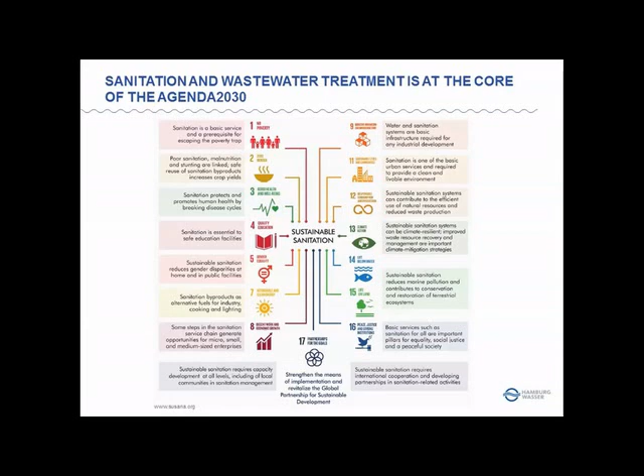If we look at the next slide, at SDG 6 specifically, it's not only one target - it covers 6 targets. Interestingly, sanitation and wastewater treatment has 2 targets, 6.2 and 6.3. Target 6.3 explicitly mentions water quality and wastewater treatment - by 2030, to improve water quality by reducing pollution and halving the proportion of untreated wastewater, and substantially increasing recycling and safe reuse. Safe reuse is explicitly mentioned, and as for untreated wastewater, you probably know the figure that more than 80% worldwide of wastewater is not treated so far. So that is a clear target to deal with.

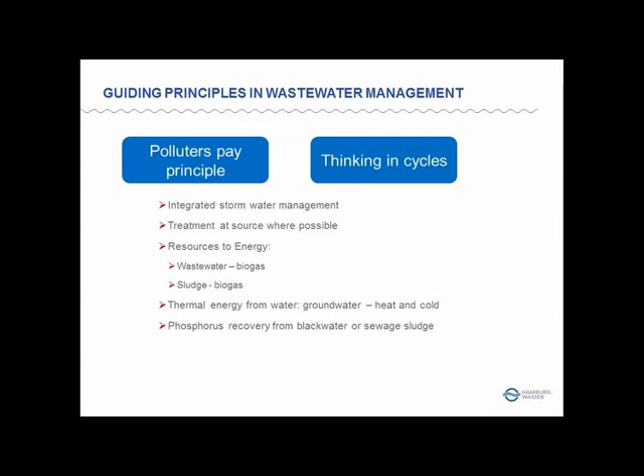Can you see it? I have to go to the next slide. Sorry, now here you can see it. The rainwater is collected in the pond and evaporated locally. As you can see, the grey water is the water coming from the household — from the washing machine, dishwashing, hand washing, and so on, but not the toilet.

That's the black water, and the grey water is separately collected and treated locally in this small residential area. The black water, from the toilet, is collected in vacuum toilets — all households have installed vacuum toilets so the black water is a little thicker, so to say, with a higher COD content, making it better and easier for digestion. So it's co-digested with organic waste in the digester locally, and heat and power are generated locally in a combined unit.

So that's now being realized. The digester has started to work, and we're very happy that it works now. We had a lot of public engagement, so the population is very positive about the project, which is important to have the customers on board, supporting, liking, and accepting it.

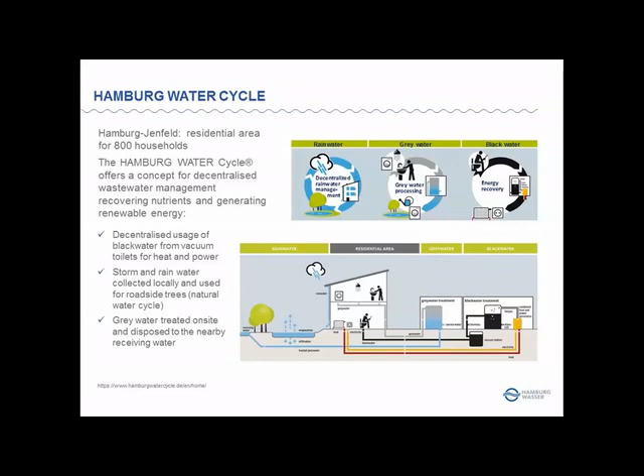Claudia, this has been very interesting and gives us the broader picture of where wastewater management fits in. I've also already learned something new, because I wasn't aware at all that artificial sweeteners would also be a problem in the wastewater system. Interesting.

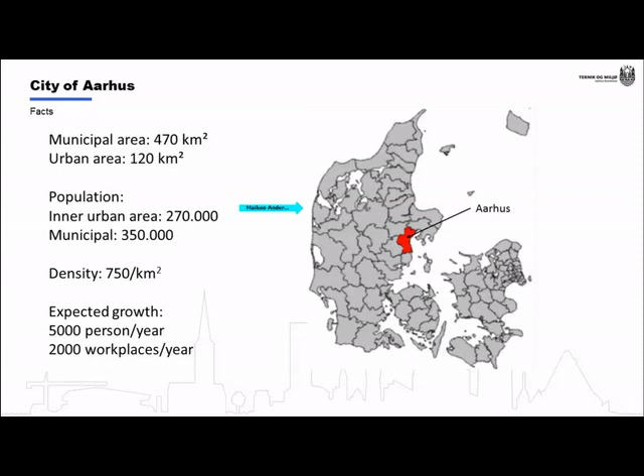We are growing very fast in a Danish context, and we have an expected growth, which we have actually also seen over the last year, of 5,000 new persons who move to the city each year, and we are developing 2,000 new workplaces each year.

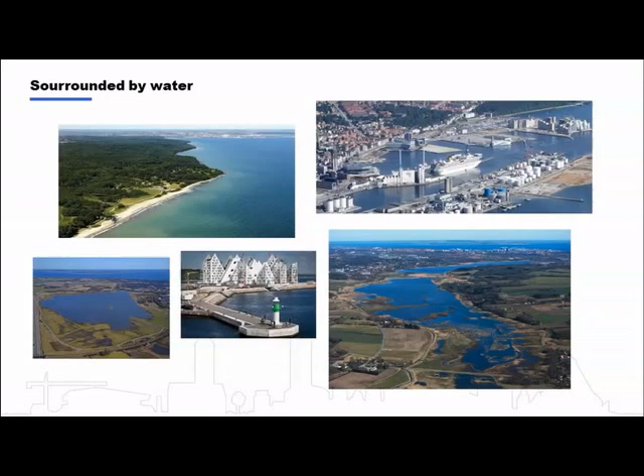We are surrounded by water, and the water has always been an essential part of our life, whether it comes to our coastlines, our lakes and nature, our ground and drinking water, or our harbor, which is the largest container port in Denmark. The water is therefore also an important focus point when it comes to planning and developing the city for our future generations.

The city of Aarhus has guidelines to secure a healthy city while we are growing and expanding as fast as we are. It's very important for us to secure clean and cheap drinking water for everyone, clean water in the streams, our lakes, and Aarhus Bay, for example for water sports and fishing, and good access to nature areas for all our citizens, for example for recreation.

And we also have a CO2 policy which says that we have to be CO2 neutral in 2030. And we are also developing the city so it's adapted to the climate changes where we expect more water in the future.

Now a little about our wastewater planning. The first sewer system in Aarhus was built around 1900, and at this time the primary purpose was to get the wastewater away from the surface for hygienic reasons and to avoid illness. In 1971, we had the first Danish Ministry of Environment, and in 1973, the first Danish Law of Environment Protection was implemented.

According to the environmental law, the municipalities must prepare wastewater plans to manage the development of sewer systems, the treatment of wastewater, and finally, but not least, to create the basis to charge the necessary tariffs from the consumers. The tariffs, I think, is one of the main points in how we succeed in financing and building up the sewer systems and wastewater treatment plants that we see today, where we have around 120 square kilometers of public sewer area. That's 100% of the urban area and around a fourth of the total municipal area. We also have a little less than 3,000 kilometers of sewer lines.

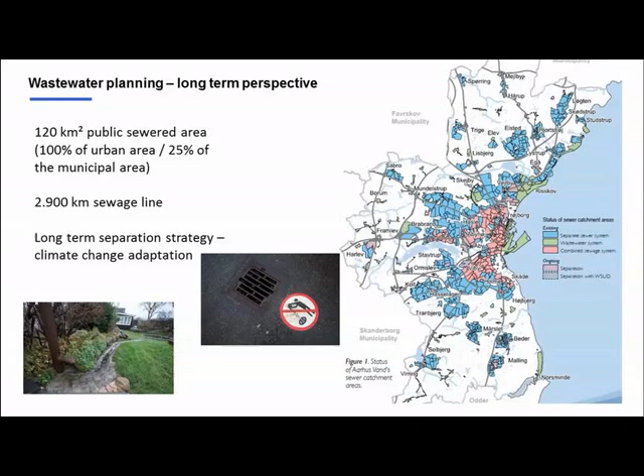We have a long-term strategy for separating all our combined sewer systems. There are different purposes for this separating strategy. One is to eliminate the overflow of wastewater to houses and terrain when it's raining. We have had some severe accidents with overflow of thin sewage into people's houses, and of course that's bad.

When we separate the sewer system, it also gives us a reduced load on our wastewater treatment plants. We have the possibility to delay the rainwater in basins or lakes where it's purified and held back, and then we reduce the risk of flooding in the city. Last but not least, we are using the rainwater for recreational purposes.

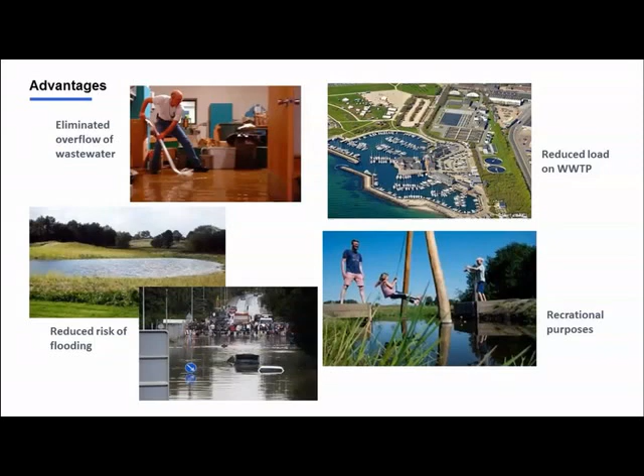We also have a centralization strategy for our treatment plants. About 7-8 years ago, we actually had 7 treatment plants, and today we have only 4 left. We are going to close down 2 more, then we'll only have 2 central treatment plants left. With this strategy, we have an estimated saving in operating expenses of 29 million Danish kroner, or 3.5 million euros per year. So it's a lot of money we can save.

There are also a lot of other benefits by centralizing our sewage plants. We have better water treatment, we can use the best applied technology, and we have better quality of water in our recipients. We also get some new urban spaces where we can do urban development. Today we have 4 plants left.

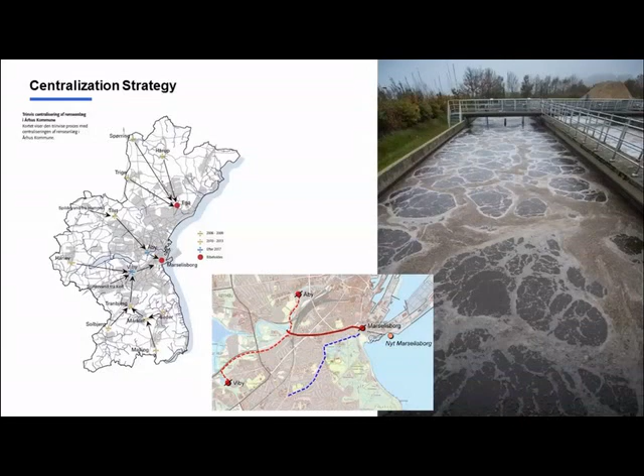Hello, my name is Maiken Bjørn Andersen, and I'm a chemical engineer and project manager in Aarhus Water, which is the water utility in the city of Aarhus.

The plant is an activated sludge treatment plant, which means that we remove nutrients biologically.

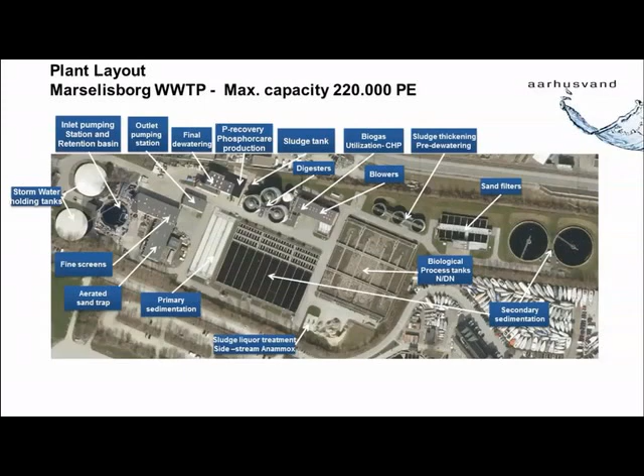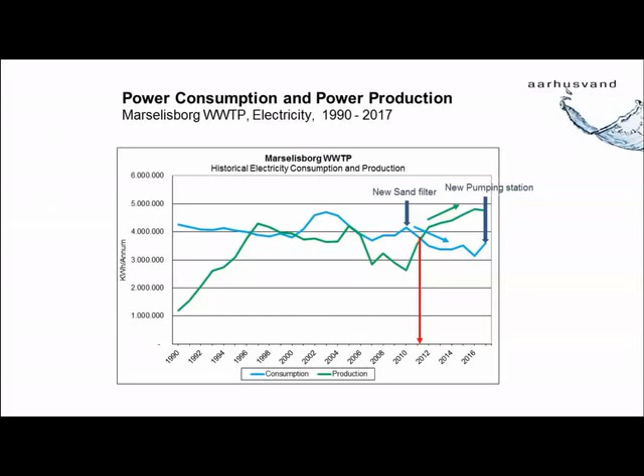On this graph, you can see that we have actually produced energy since 1990, producing electricity since then. Since 2006, we made major optimization actions to improve the water treatment, reduce energy consumption, and increase energy production. As you see on the graph, the plant became net energy positive in 2011.

The main activities that we have done from 2006 to 2017 have been automation of N removal, implementation of Anammox bacteria, replacement of the final dewatering unit, and a more efficient blower. I have chosen to focus on process optimization and Anammox bacteria, as these are the newer technologies.

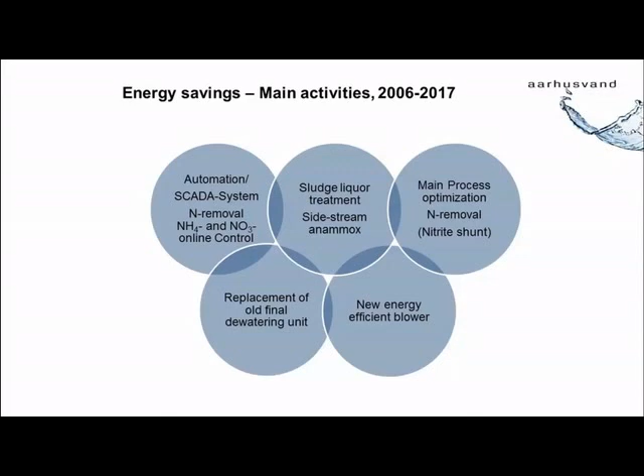To optimize the nutrient removal processes, we installed online monitoring of ammonia, nitrate, and phosphorus. The blower was controlled according to ammonia load, and the lengths of nitrification and denitrification phases were adjusted. A new return sludge and excess sludge control was implemented.

This was a relatively small investment, as very little new equipment was installed, and most of the investment was actually man hours and developing new strategies for control.

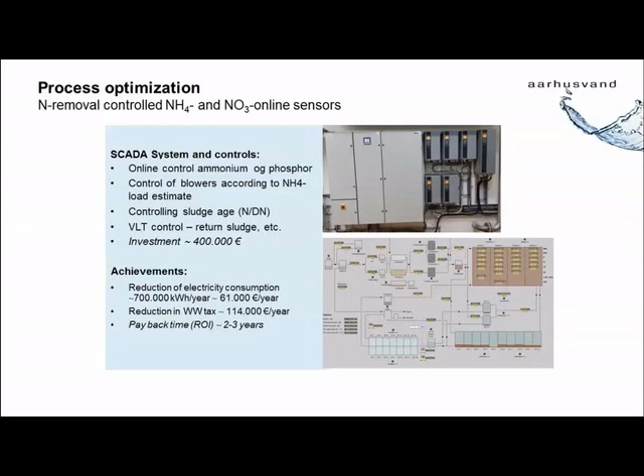A big thing that we installed was the side stream Anammox treatment. We implemented that in 2014, and this should reduce the ammonia load on the process in the mainstream.

The deammonification pathway is more energy efficient than traditional nitrification and denitrification because less energy is required, so we don't have to blow so much air into the side stream. Also no carbon is required in this process, which opens up the possibility of harvesting more COD in the primary treatment, which also leads to increased biogas production and therefore increased electricity production.

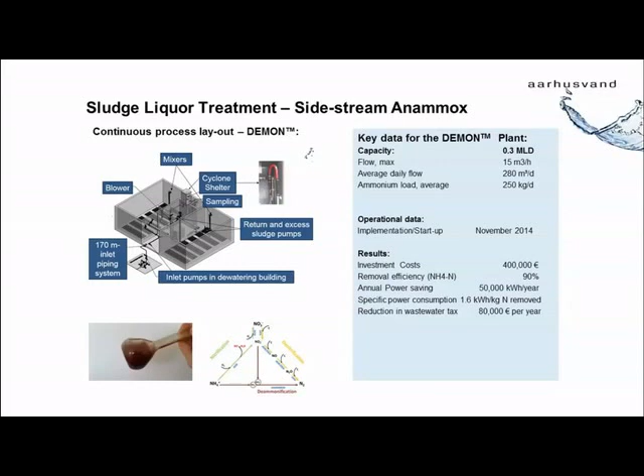A side effect that we didn't foresee from this side stream implementation was that we actually think that we implemented a nitrite shunt in the mainstream.

In 2016, after around 1 year of operation of the new part of the plant, the specific energy consumption for N removal dropped dramatically, as you can see on this graph. Our hypothesis is that we made a nitrite shunt with the Anammox bacteria, but we haven't been able to prove that yet. We are still working on that.

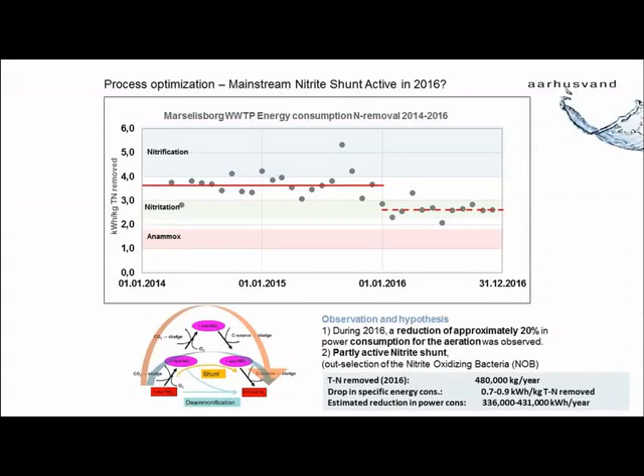With numbers from 2014 to 2016, we can see that we have reduced the power consumption of the plant dramatically, even though we actually implemented new technologies on the plant.

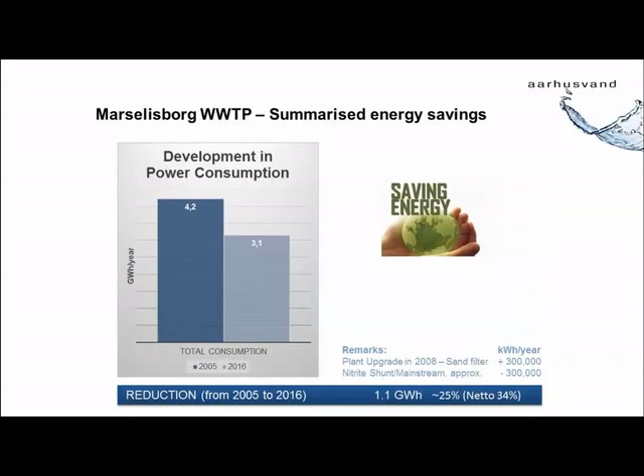In Aarhus, we think circular economy into the daily work, and this has resulted in us using the wastewater to produce energy from wastewater sludge. We produce heat and electricity, and the excess sludge is used as fertilizer on farmlands.

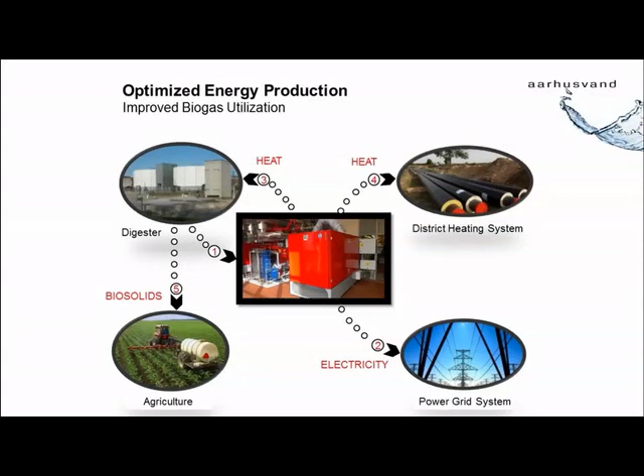To use the biogas in the best way, we implemented some new gas engines so that we could utilize all of the gas that we produced. We also implemented activated carbon columns for gas treatment, and this ensured that all the produced gas can be converted into energy, and that the gas engines have a longer lifetime as the gas is treated before entering the engine.

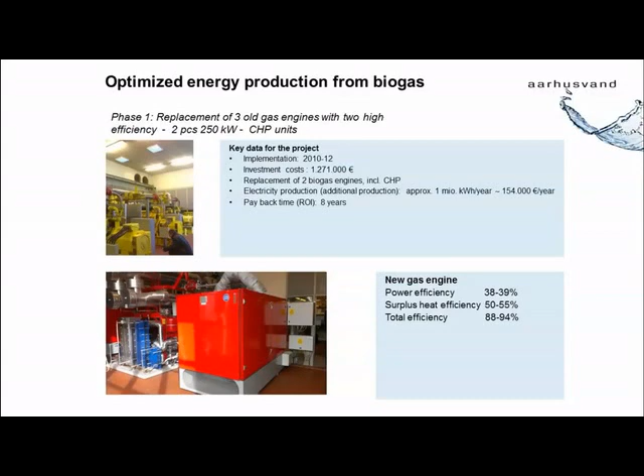Here you also see pictures of the gas engine installation and the gas treatment.

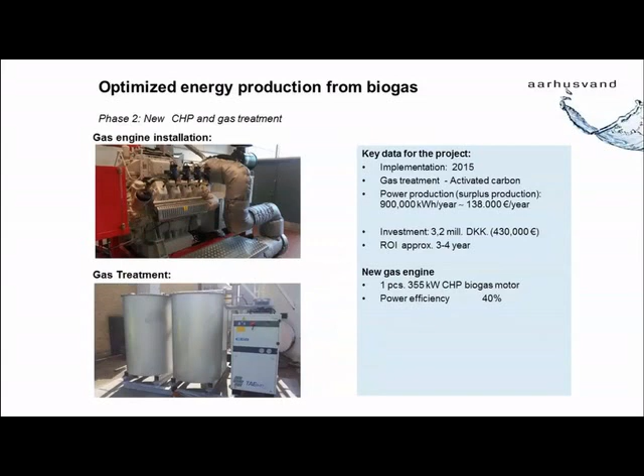The struvite contains phosphorus, and since it's a limited resource, it's important to investigate the possibilities for phosphorus recovery. The purpose of this plant is to control where the struvite precipitates and use knowledge of the chemical processes to produce a high quality, clean fertilizer that can be used on farmlands.

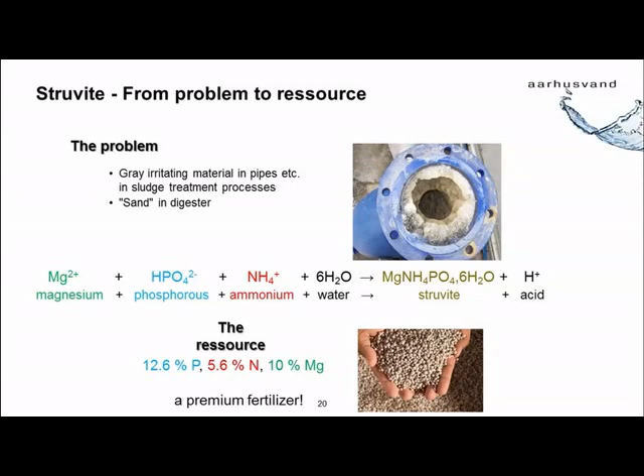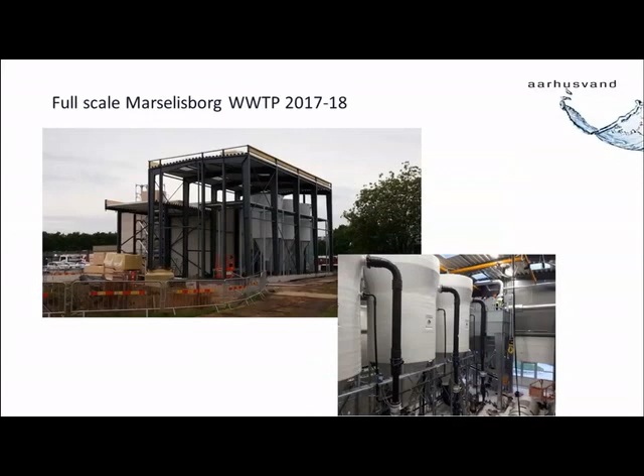Here you see some pictures of the plant being constructed. We put it into operation at the beginning of 2018, and we're still working on getting the best results from it.

So I would like to thank you for your attention, and this was what we brought.

Thanks a lot, and very interesting. One can see such a wastewater treatment plant as a whole world in itself, with so many different aspects that you have to look at, especially now embedding these plants into the circular economy in a city. That's really another exciting ambition to follow, and I think Aarhus has gone good strides forward to make this happen.

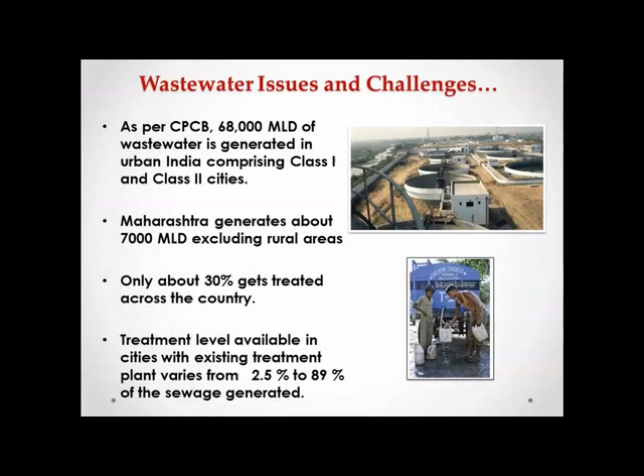So some of the mechanized systems actually fail when we don't have power for 2 hours or 4 hours during a 24 hour period. That was one of the challenges, and that's why we started working on a technology. We looked at how nature-based treatment can be used, and many of you would be aware that constructed wetlands have been used for stormwater cleanup on a large scale in many countries. But we looked at whether we could use this in a very engineered way for sewage treatment completely. The whole idea of doing this was that if we do it in a decentralized fashion, in a smaller region, I can actually use the treated wastewater then and there. We called it Phytorid, because phyto means plants and rid means getting rid of pollutants.

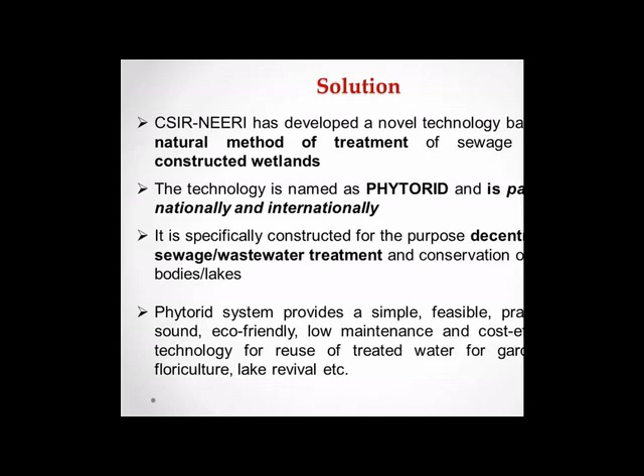It's a combination of horizontal and vertical wetlands, which has not been done in the past. People normally do one at a time and then the other one later on. But we have been able to combine these two things together.

There are two novelties for which it was given a patent. One is that normally all wetland-based treatment systems use soil for the beds for the plants to grow on. In this case, we just use gravel, which is stone pieces, and we treat the plant's root system in a way that they survive on the gravel. That was one. The second is that most wetlands across the world have faced the problem of clogging. The moment you have biofilm formation and if soil is there, the movement of water is stopped or limited. So we have been able to solve that hydraulic problem.

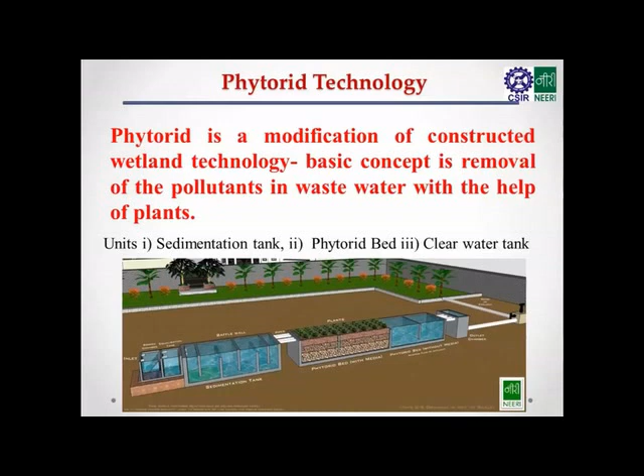This is slightly a pictorial presentation of the whole thing. As you can see at the bottom, we have bigger gravels which are between 6 to 8 inches. In the medium portion, we have about 3 to 4 inches. The upper region is about half to 1 inch, and that's where the plant roots are. These plants are such that they use their rhizome as part of the plant, which actually releases oxygen into the bed, so the whole oxygenation process happens through the plant systems.

We look at BOD getting removed through microbial degradation, which is both aerobic and anaerobic. The bottom portion is anaerobic and the upper portion is aerobic. Nitrogen is removed because ammonification takes place, and phosphorus is removed due to media absorption as well as plant uptake. We also see almost 95 to 99% pathogen removal, but it doesn't completely get removed after the Phytorid bed, so we have to essentially do disinfection at the end.

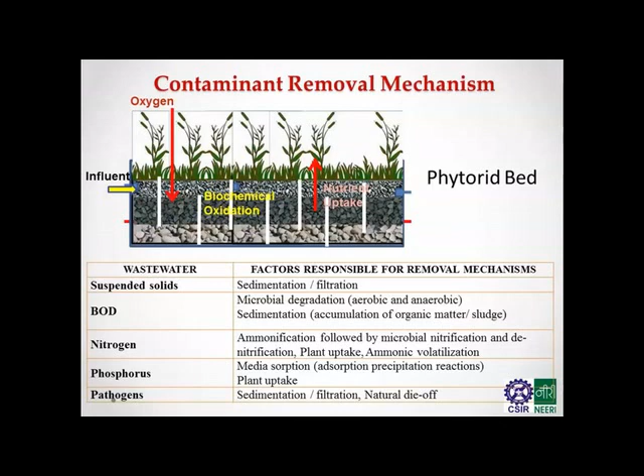When we look at this technology properly, we have an institution in our country called Central Public Health Environment Engineering Organization. This is the organization which actually makes manuals to adopt technologies. We have been able to demonstrate many of these technologies in the recent past, and now they have got listed.

Since we are not using any chemicals or any moving mechanical equipment, the energy cost is very, very low. In some places we may have to pump if the gradient of the place is not very good, so that's only the pumping cost that's taken care of. In tropical countries like ours, we have major issues of mosquito nuisance and odor, but all of that gets taken care of once we use this technology.

When we did this analysis of various technologies on a least cost basis, like MBBR, activated sludge process, or even membrane bioreactor, this comes out to be the cheapest option that we see right now in the country.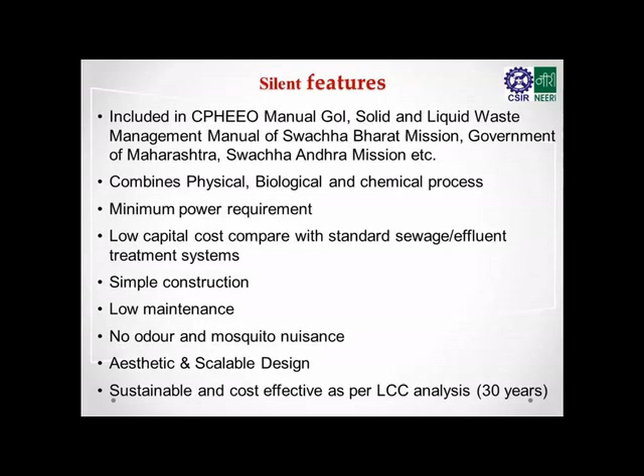It's important to notice that in India we have a rainy season spread over just about 3 months. The rest of the period is actually a dry period, so water is scarce most part of the country, and any water that comes in can be important for all of us. So we have started using this treated wastewater for lake rejuvenation projects. I'll show a picture as we go ahead.

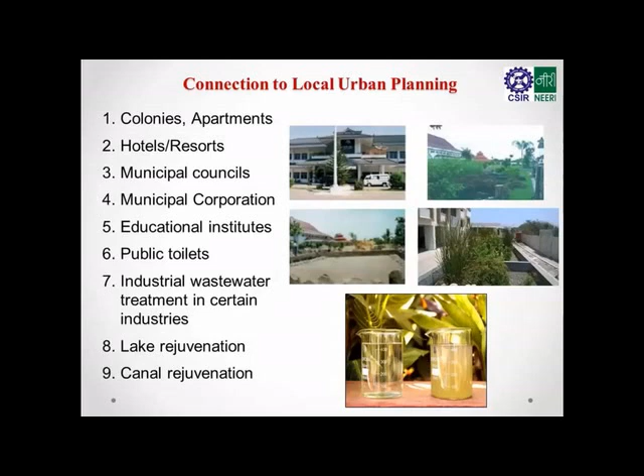As you can see, in the picture down below in the beaker, we get water as clear as normal drinking water. Of course, it's not fit for drinking.

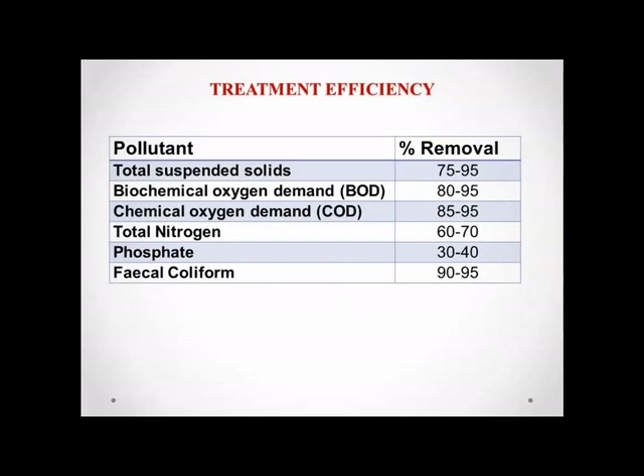If you look at treatment efficiencies, we get suspended solids up to 95% removal, BOD up to 80 to 95%, and COD up to about 95%. It's very important to note that normal conventional sewage treatment plants, like activated sludge treatment plants, do not normally remove nitrogen and phosphorus, which actually happens in this case. Some pathogens also get removed.

So what we did was get a drain which was just close by, and we picked up 3 million liters per day of sewage, treating it using this technology, and the same water is being used to revive the lake. Now the lake has perennial, continuous water available.

If you can see some of these places where it has been implemented, all of these places are actually being used for gardening purposes and toilet flushing purposes after disinfection. The contaminant level, as I explained earlier, is just right for reuse for specific purposes. It can't possibly be used for any drinking water sources or anything else.

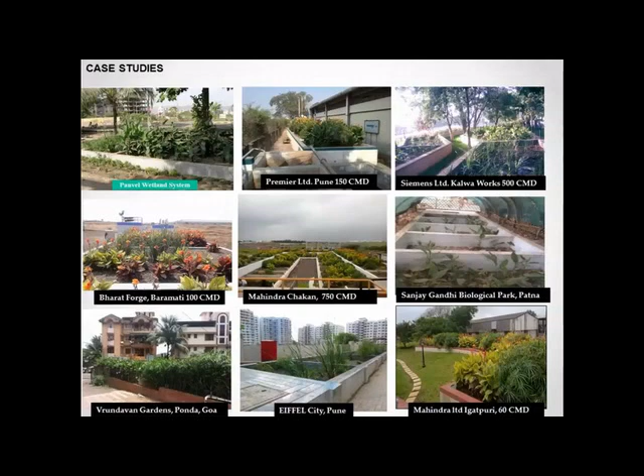This is where it ends, and as you can see in the previous slides I showed you, it has been implemented in resorts, buildings, everywhere else, and we are looking at automating this whole process as we go ahead. The cost of treatment is almost one-tenth of conventional treatment plants, and therefore as a decentralized option, this is appearing to be one of the good choices to get implemented across the country.

Still, it's not something which has penetrated across, but it's taking shape, and probably in a few years people will opt more and more for this technology. Thank you.

Thank you, Dr. Kumar. It's really amazing what nature can do for us if we understand it well, and it seems like a really very useful solution, especially for an Indian context or for countries in similar conditions. It's great to hear from that.

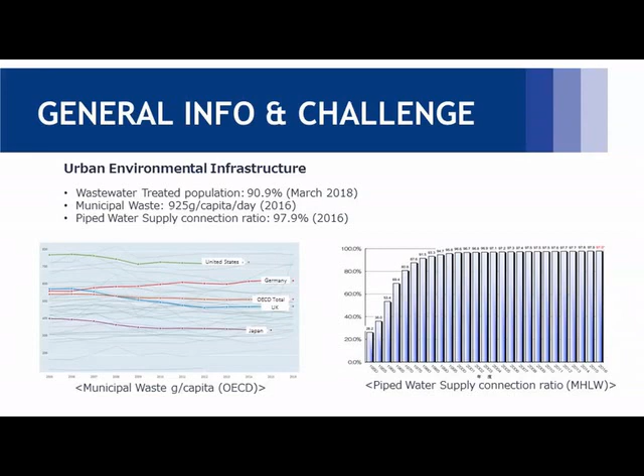The next slide explains where we are in terms of population demographics. This is very significant in the case of Japan, and I'm sure it's the same in some Asian countries. I'd like to introduce this slide particularly because I think this is something most countries will face in the near future. This will give you some picture to help you understand where we are in Japan.

The graph on the left-hand side was produced in 2014. Sorry that this is in Japanese, but it literally shows our projection of population leading up to 2050. The green part is where we have population living at the moment, but we expect there will be no people living there because of population decrease in 2050. The dark blue part is where we expect over 75% to 100% population decrease. Blue is where 50% to 75% decrease is foreseen, and light blue is 25% to 50% decrease. The yellow part is where 0% to 25% decrease is expected, and the red part is where we expect to see population increase.

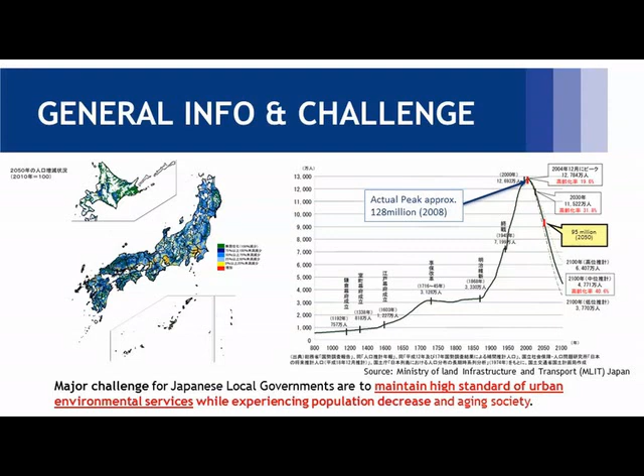With this general information, the national government came up with the 5th Basic Environmental Plan last year in April. This plan is usually revised every 6 years, and in it they came up with the concept called the Regional Circular and Ecological Sphere. Basically, this means clarifying the importance of promoting carbon and resource circulation on optimal scales, according to the characteristics of the regions concerned and the nature of the resource to be recycled. So it's a simple concept: whatever resource is suitable for circulation in a small area should be circulated in the smallest zone possible, and whatever resource is suitable for circulation in a larger area should be expanded and circulated there.

With this concept, we are trying to achieve a society with energy circulation, material circulation, and a society balancing and living in harmony with nature. This has been promoted by the central government to be a guiding principle for any kind of planning that will happen from now on.

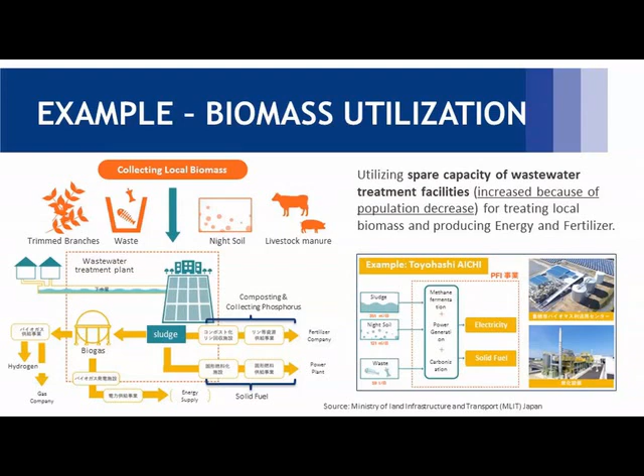But then, as introduced, I would like to share with you some of the activities in Japan on obtaining public support. I think all of you participating today would understand that wastewater management is a highly costly infrastructure—there's a statistic showing it's actually 3 times more costly than water supply, and so on.

And we all understand that once a wastewater treatment plant is developed, it all goes underground and becomes invisible. So it's very difficult to obtain public support when the facility is invisible. People tend to forget what they're benefiting from. So public relations for the wastewater treatment plant or facility becomes extremely important to continue having government subsidy flow into this sector. Otherwise, maintaining the infrastructure is extremely difficult.

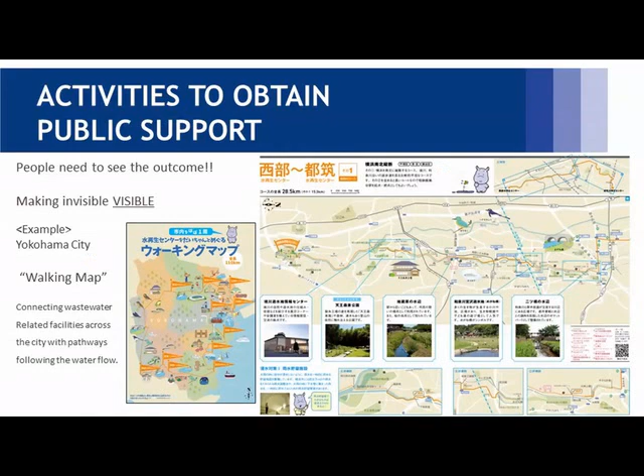In Japan we have a culture of animation, and Yokohama City has a character based on a hippo. As you may know, hippos live in very clear water. So this hippo is used to draw interest from children and to deliver a message about something associated with dirtiness or things not clean. By using this animation, it's much easier to communicate with children or with the public.

The character is used for that purpose, and not only for this pamphlet—it appears every now and then when they conduct a public seminar, for example, to draw people. One example is this pamphlet, where they introduce the major facilities related to drainage and wastewater management, including public information centers and nature parks you could visit.

The point is that all this is possible because we have wastewater facilities that are functioning properly. There's also information about underground water reservoirs for drainage, which we sometimes open to the public. This is a good example of infrastructure that usually goes unnoticed, but it's important that local people know about it—it costs a lot, but it protects their lives. So they use this pamphlet to introduce this too.

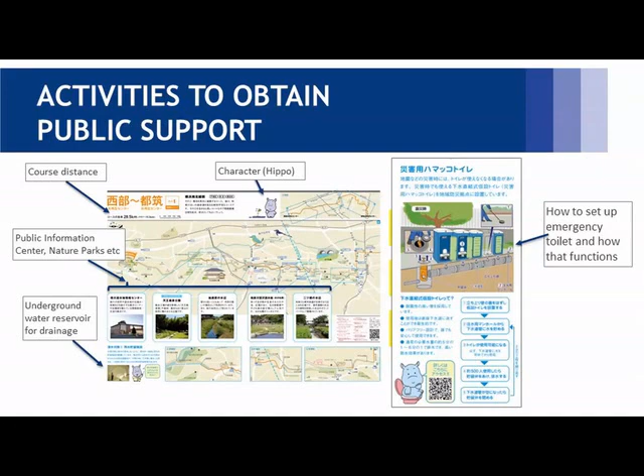Another example, which is quite unique, is the manhole card that is being produced. You may know about sports cards, where kids collect cards of their favorite players and exchange them with friends. It's basically the same similar concept.

Traditionally in Japan, local governments tend to use their own local culture reflected in the design of their manholes. Please don't misunderstand—not all manholes are colored like on this card; most are not colored, but the design is still there. You can see many kinds of designs, like Japanese castles, Mount Fuji, Hello Kitty animation, and dinosaurs.

To increase publicity, they called upon local governments to apply to be part of this program, and the local government pays just for printing and such. This card is produced, but it's not sold—if you want to obtain it, you have to go to a particular place.

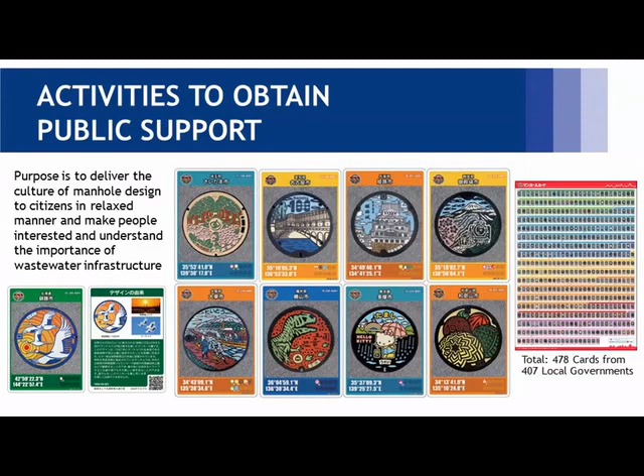Yes, this is for your information. Also, I mentioned that the government has been promoting producing fertilizer and energy through wastewater treatment plants, and one way of using the resource collected is agriculture. Of course this is a challenging sector, because when people say we use this fertilizer for agricultural products, it's difficult to obtain support since it's negatively perceived. But by conducting public relations and making people understand in an open manner, you can obtain support from people. This is the case in Japan now. There's still a lot of challenge to address, but through these activities there's a lot of expansion of using fertilizer or resources collected through wastewater management in agricultural products.

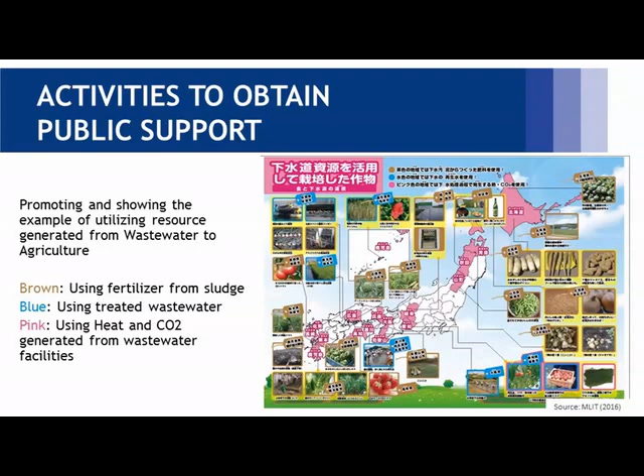Great, thank you, Togo. I again learned a lot of new things, and I feel like I want to buy a ticket to Japan to come see all these things myself as soon as possible. It's really nice to see these different perspectives on how people know about the infrastructure and what is happening underneath their feet, and to have such nice ways of doing that is really interesting.